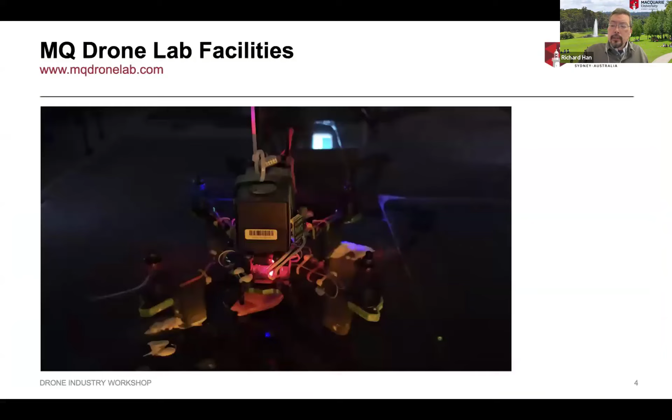Okay, so here is, hopefully, let me turn down this a little bit. This is a quick view of our drone lab.

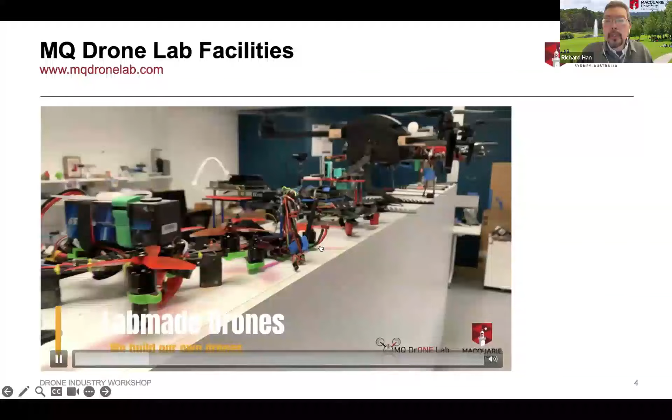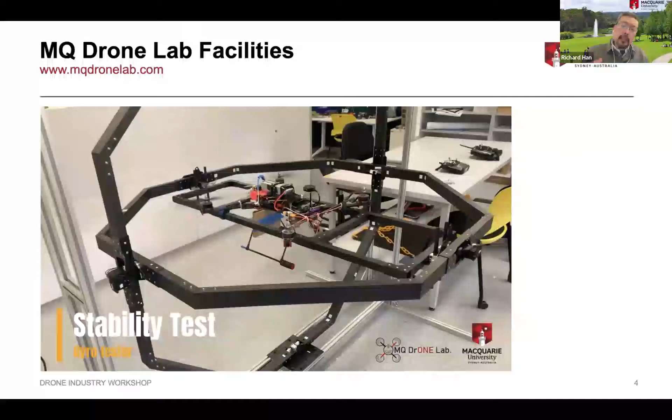We actually build our own drones from scratch. We don't just buy DJI off the shelf, which is fine, but as researchers, we're really devising new innovative drones, and so we have our own 3D printers.

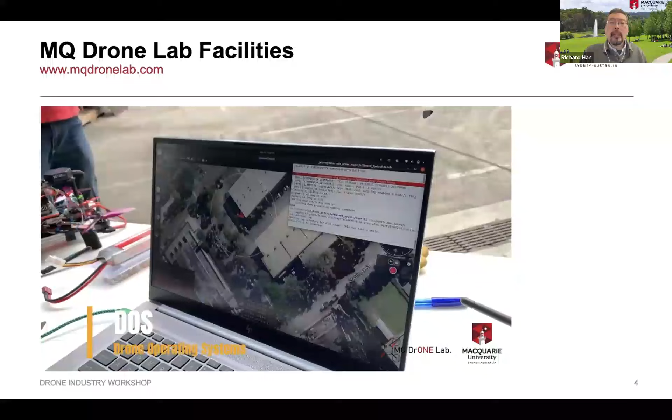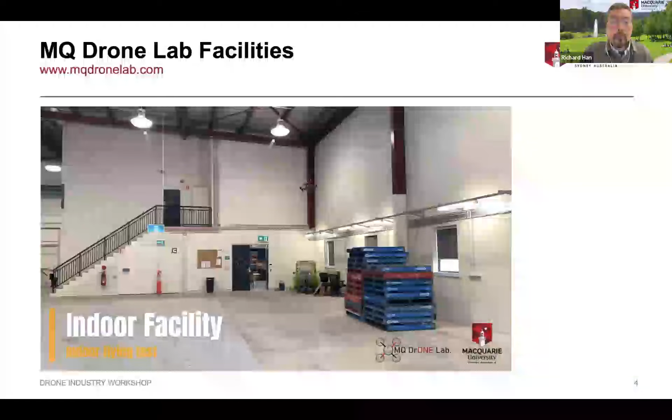We have our own calibration rack that you saw earlier, and then we have our own flight facility, where we actually can fly the drones indoors before we take them outside. It's very nice to have our own warehouse. It's very important, and not a lot of universities actually have this. We're pleased to have all of this.

The door that you saw in the background there is an example - our lab is right next door to the indoor flight facility, so we can very quickly build a drone and then test it indoors.

What are some of the research projects that we have going on? We have four main pillars of research in our drone lab. We're talking about autonomous drone systems because we think they should not have human intervention in the future, or less and less human intervention. We're very interested in swarms - what can you do with teams of drones? I'll show you two projects that we're working on here at Macquarie.

We're also working on high performance drones, drones that fly longer and can stay up and go greater distances. We have a $2 million project with Seaflight on more aerodynamic design of fixed wing UAVs, and we also have some research that we're pursuing a patent on that tries to improve the motor efficiency of drones.

We think we can improve the efficiency by up to 30%, which would mean you should be able to fly for 30% longer.

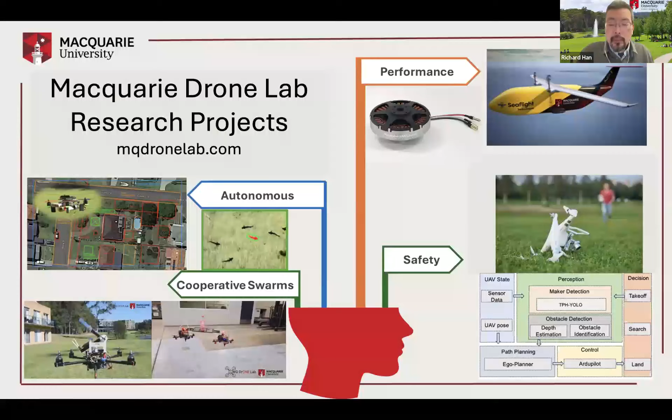The first project I want to talk about is our collaborative drone swarm lift and transport. Here we have two drones lifting a payload together, and we think this could very well be the future. This research was a finalist for a Best Paper Award at the IEEE ICARM Robotics Conference in 2024.

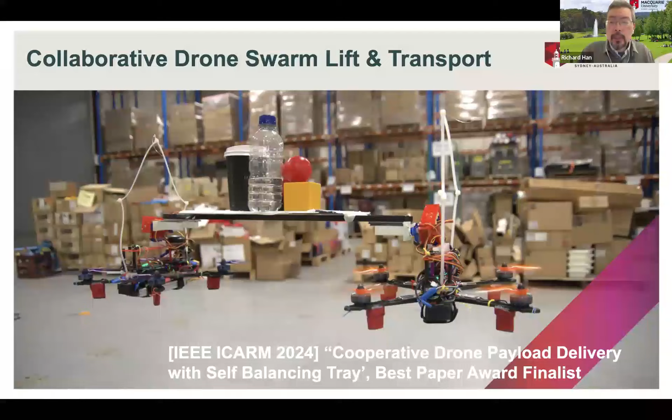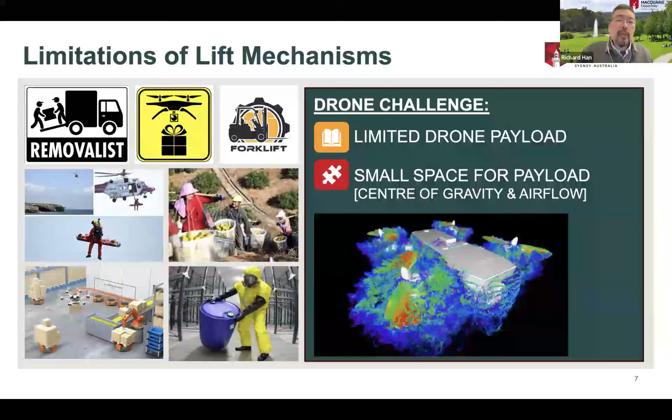What we're addressing is that each individual drone can only lift a certain amount of weight, and since these are usually small drones, there's not much room for additional payload. So we asked: what can you do if you combine multiple drones to lift more weight together? But to do that, you first have to solve a couple of problems.

You can see there's a great deal of turbulence underneath the propellers of the drone. This combination means that when building a group-based cooperative lift, we have to take into account both turbulence and balance.

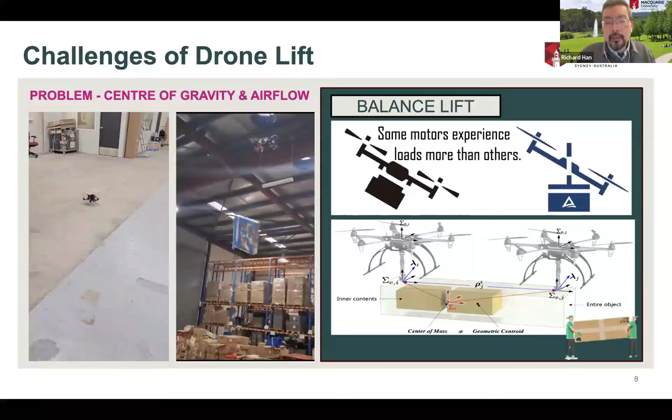Our initial idea for cooperative lift was to have a pallet holding the objects we wanted to lift, with drones attached to different sides of the pallet, lifting together. This is a very complex control problem, as they have to keep it balanced while transporting the payload.

This particular approach already shows problems, because the payload is underneath the propellers, subject to complex wind dynamics that cause strange behavior.

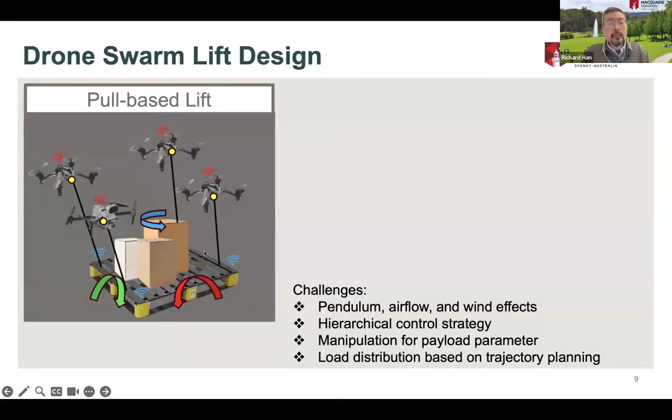So instead we said, why not move the payload and the pallet above the propellers, as shown here? In this example, the control algorithms needed to move the payload can be much simpler, since we don't have to deal with the interaction between the payload and the turbulence wind effects.

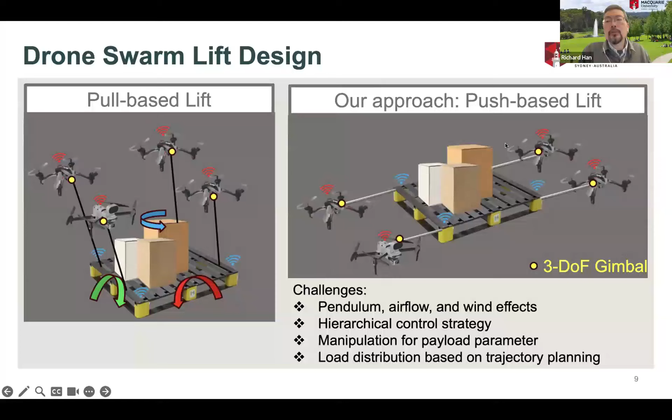We call this approach push-based lift, in comparison to the pull-based approach on the left. We've actually built this system.

We started with two drones, hoping to expand to more in the future, just to prove the concept. Shown here are two of our drones with a plate in between holding the payload. We call this plate the SBT, or self-balanced tray.

It has servo motors with three degrees of freedom that can adjust the level of the plate between the two drones, one on the right and one on the left, which maintains balance.

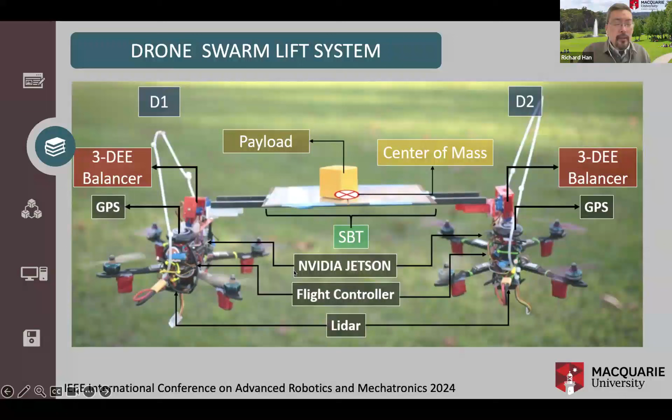Also, the drones have LiDAR attached to them, allowing them to hold the same altitude, and in addition they have GPS and many of the normal sensors for a drone.

If we drill a bit more deeply into how this works, looking top-down on the plate, we see it's divided into sectors. This tells us, if you put a payload on the plate, what is the center of gravity, and whether it's unbalanced. For example, here this is slightly off balance.

It's not in the center of the plate, and that's useful information because we feed it into the control algorithm. Here's our resistive plate, and we feed that into an Arduino, which has a PID controller on board that computes the amount of correction needed for each servo motor. We have control over three degrees of freedom: the pitch, the roll, and the yaw, and we control that over both ends of the plate.

So what happens is we have a lead drone that does the calculation, and it communicates over Bluetooth to the follower drone, telling it how to actuate the servo motors on its side of the plate. That way we maintain balance. In addition, we have our normal Jetson Nano on board these drones, which controls the flight controller, telling the drone where to move or hover.

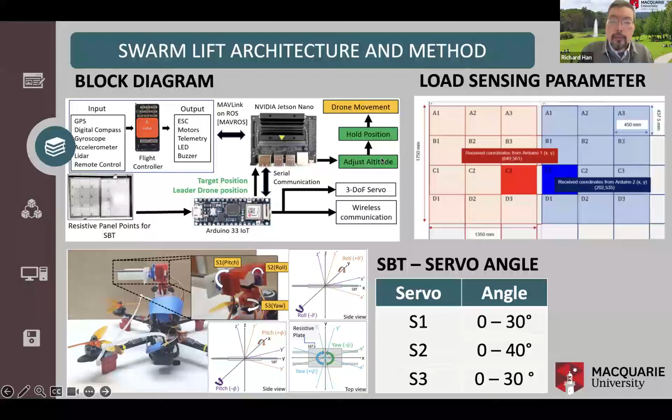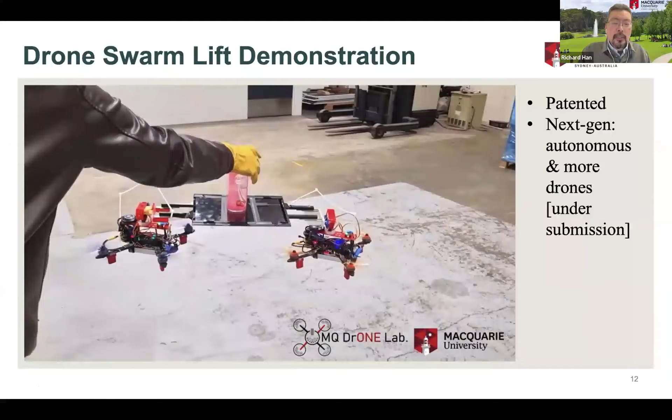Here's a demo of how this actually works, to prove that we got it to work. Our PhD student is putting a dynamic load here—it's not even a static load, it's a bottle of water. We see that our two drones are able to lift this together and transport it.

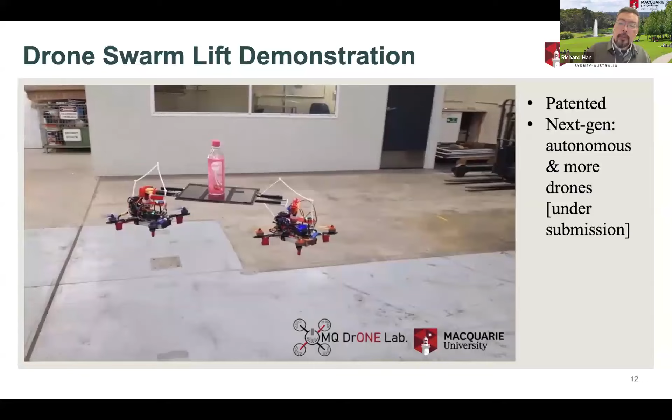We see Alice over here feeding remote control commands to the lead drone, which then moves the whole group together. This idea has been patented and published, and we're working on the next generation version, which will have more drones, be able to lift more weight, and be even more autonomous, so that we won't need remote controls at all. Okay, so that's the first drone swarm project.

The second drone swarm project, or drone team project, involves emergency battery services. I noticed our prior speaker mentioned limited battery time as a problem for drones, and that's what we're addressing with this project. This was just presented last week at the ACM Mobile Computing Conference, a top conference in mobile systems, which is why I'm here in the United States presenting it.

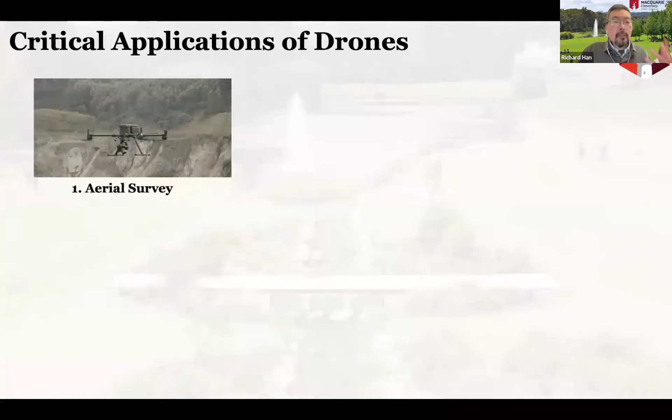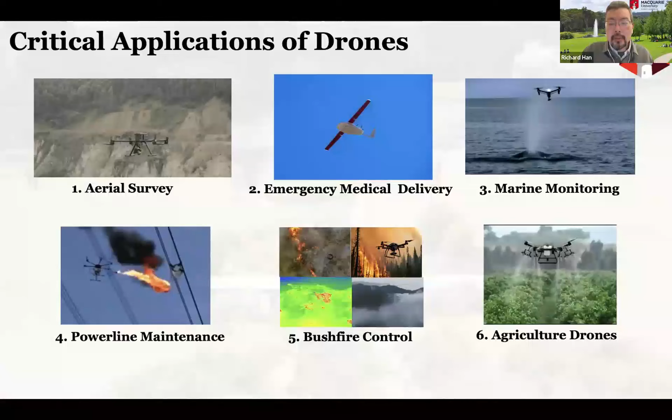It's likely that for the foreseeable future we're going to have this problem, because Moore's law does not apply to battery life—it's not doubling every year. Battery capacity is only growing incrementally, by about 10% per year.

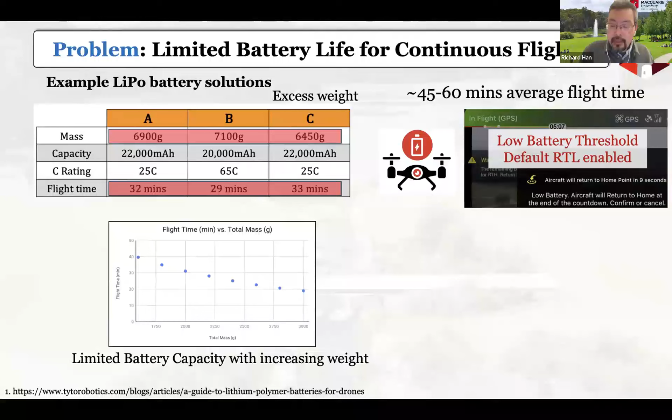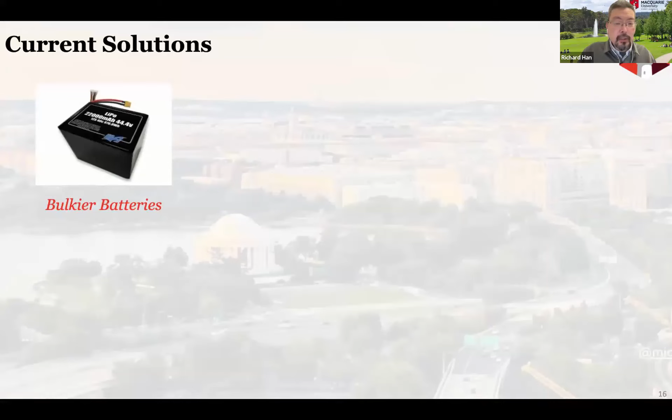So what are the ways people deal with limited battery life on drones? Well, they try to buy bigger batteries, but there's a limit to what you can do there. Another approach is ground-based battery swap, where they fly back to a base station and swap the battery, or fly back to do wireless charging. The problem with those approaches is that the drone has to leave the field wherever it's doing its work, and in certain cases that may be okay, but in others, like tracking a target, it's not.

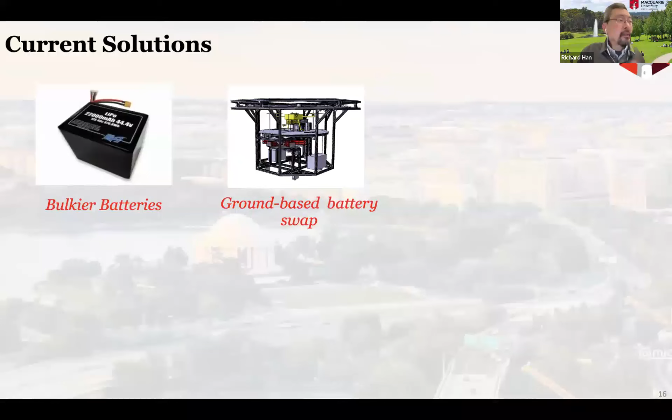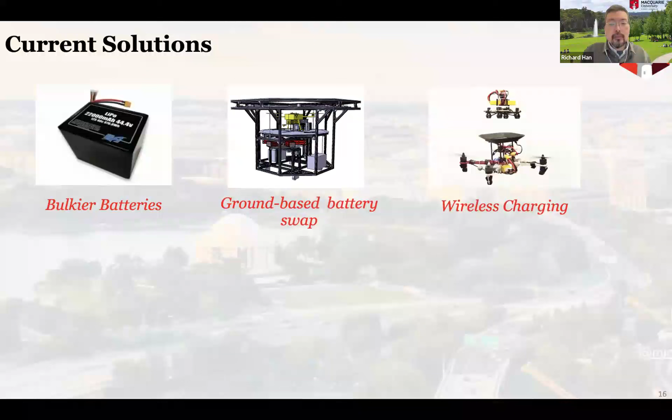There are some cute approaches where a flying battery actually lands on top of a drone, but this flying drone is much smaller than the main drone that needs the battery, so it doesn't work very well. Another option is just to buy more drones, so if one drone's battery runs out, you fly a second drone in. That requires spending a lot more money and managing a lot more drones, which is a big headache.

Finally, there's one prior work that tried to do mid-air battery swap by dropping the battery from a top drone to the bottom drone, but as we saw, there's a lot of downdraft turbulence between the two drones.

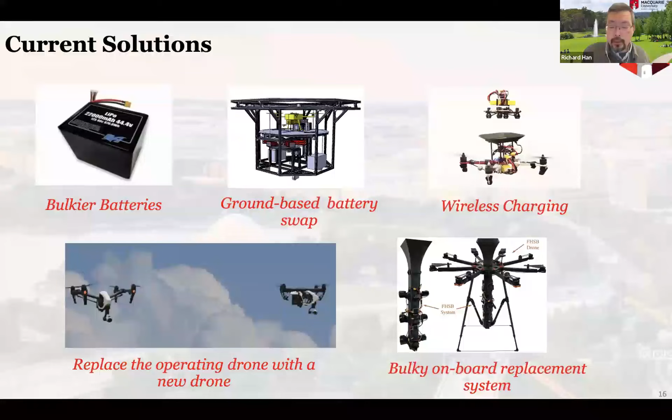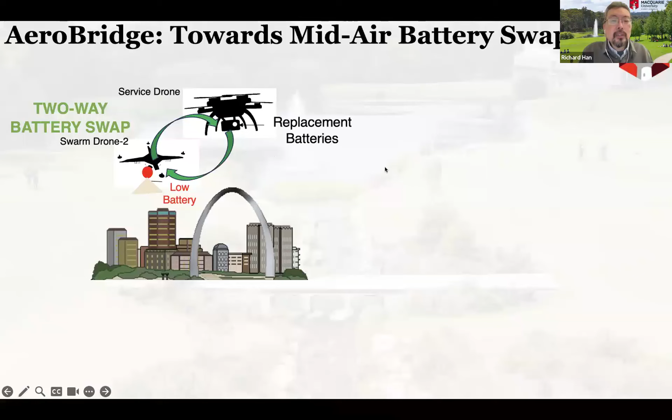They have to be separated by 5 to 7 meters, which makes the accuracy of the drop more uncertain. So we said, let's experiment with the idea of a mid-air battery swap, where a mother drone with a fresh battery comes near another drone in the field, and we swap batteries in midair, giving a fresh battery to the low-battery drone and retrieving its worn-out battery instead.

This approach has a lot of advantages. It means your drone can now stay in the field almost indefinitely, subject to mechanical breakdown. Also, we're bringing the battery to the drone rather than forcing the drone to fly back to a base station to get a new battery, so it can continue to do its tasks in the field.

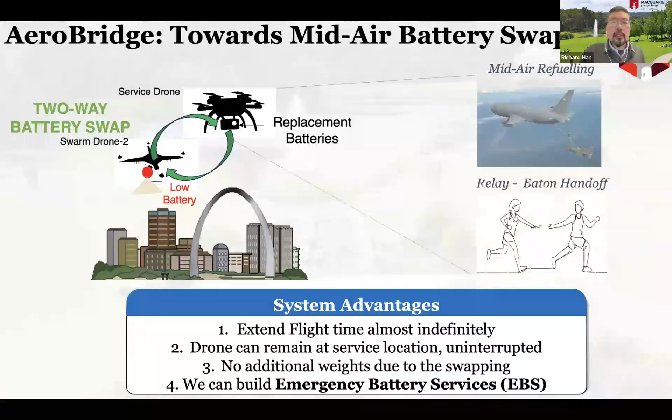Also, because we're swapping the batteries, we're not adding any more dead weight to the drone, since we're taking away the dead battery. So we call this Emergency Battery Services, or EBS, and we think this is going to be very common in the future as an additional feature for drones.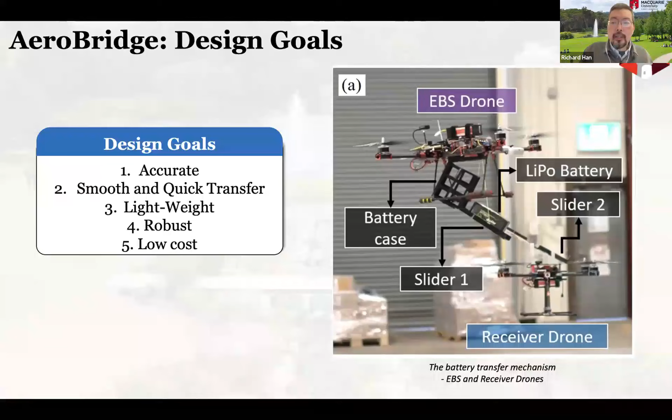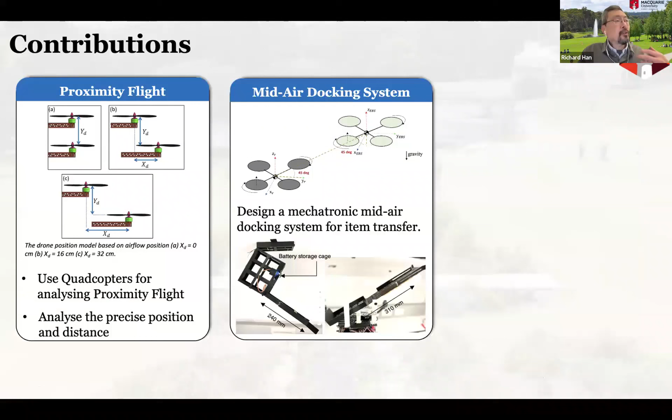So we eventually built this approach. Basically, we have a slide which allows the battery to slide from one drone to the other. The trick is how to get these two slides to align in midair. We have to get the drones close together, and figuring out how they approach and navigate toward each other is one of our contributions. Then how the slides meet—we call this the last centimeter challenge.

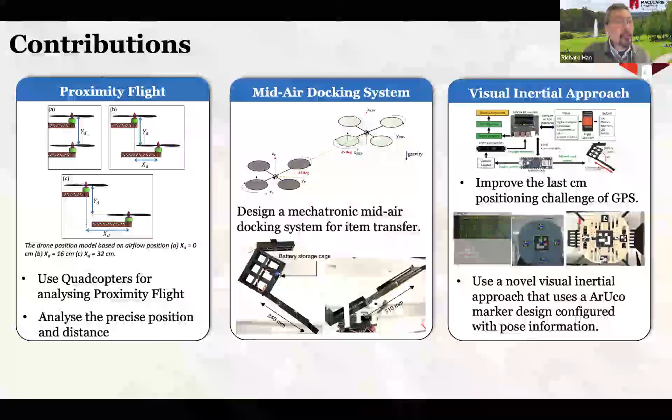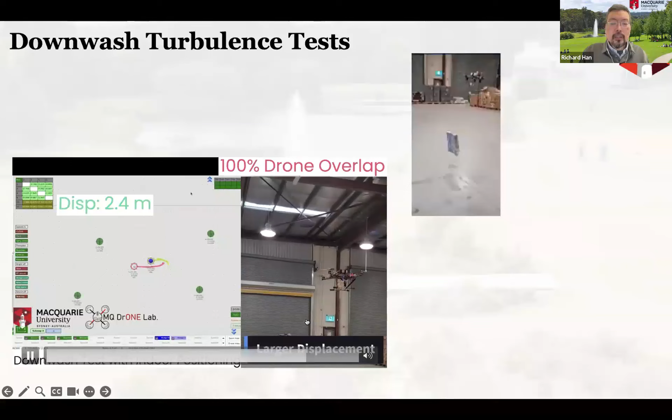We already mentioned that the drones, when near each other, experience a lot of turbulence. As you can see in this example, the drone underneath is pushed away by the turbulence when they're directly on top of each other.

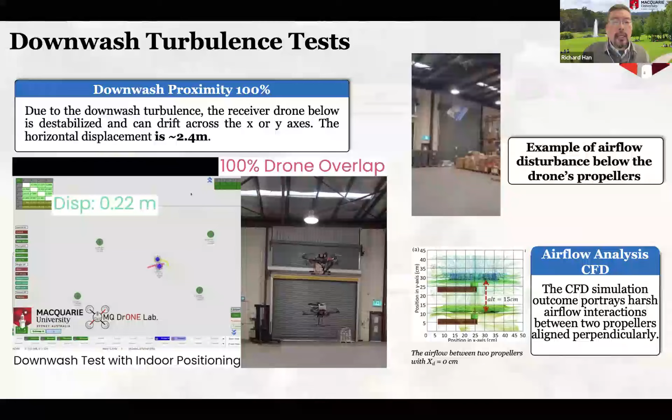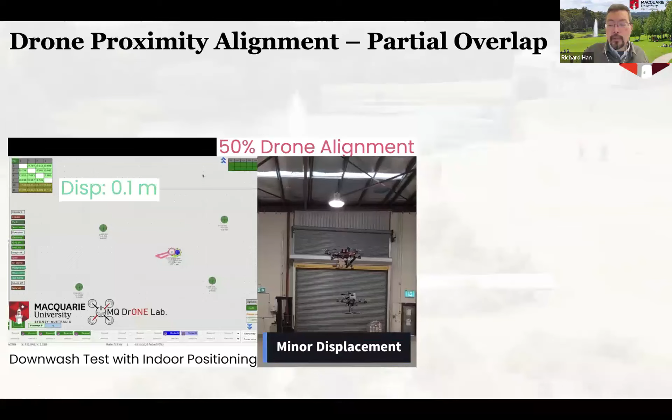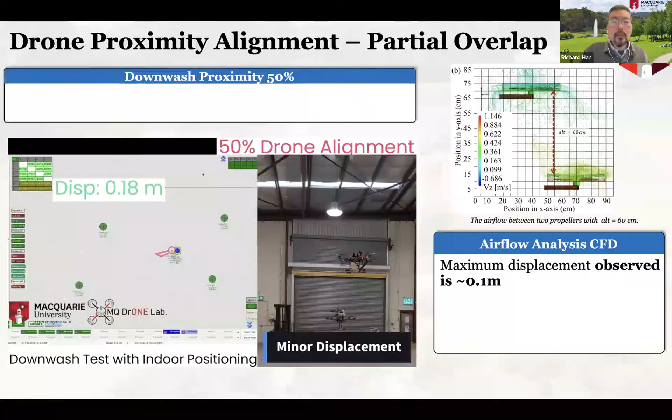But we found that you can overlap the drones by almost 50%—not 100%, directly on top of each other—but if you overlap maybe only half of the propellers, you're able to get them relatively stable near each other, and the displacement isn't nearly as bad. We use that to our advantage, because it allows us to get within 0.5 meters of each other, which makes the docking a lot easier.

The actual orientation and docking is achieved by putting visual markers on the receiving drone. We put a unique marker that can be identified by the top drone, so it knows which drone it's doing the battery swap with.

Then we add four extra small markers—front, left, right, and back—that are all unique and help determine the top drone's orientation relative to the bottom drone. It will know if it's in the wrong place and has to move around until it's perfectly aligned. Also, because of the size of the markers, it knows the distance it is from the drone.

When all of these factors align—when all the markers are correct and their sizes are correct—then you're in the right place, and the two slides can come down, connect, and transfer the battery. So let me show you.

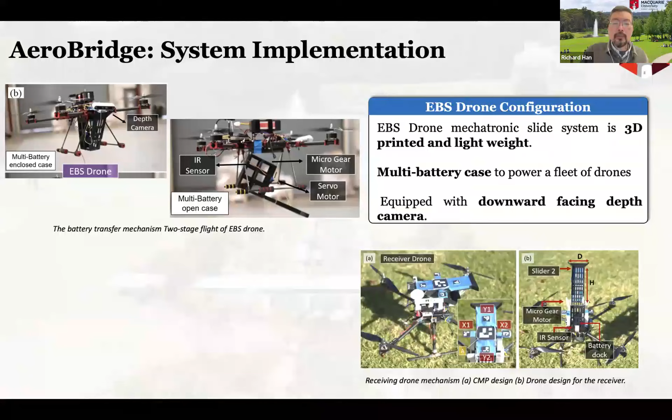We built the system: the top drone with a slide, and the bottom drone with the markers and a receiving slide. Let me show you—we're out by the lake here, and you see that we're able to transfer the package from the first drone to the second drone.

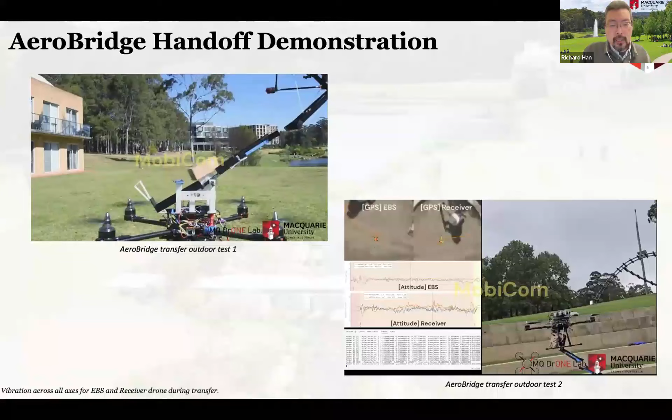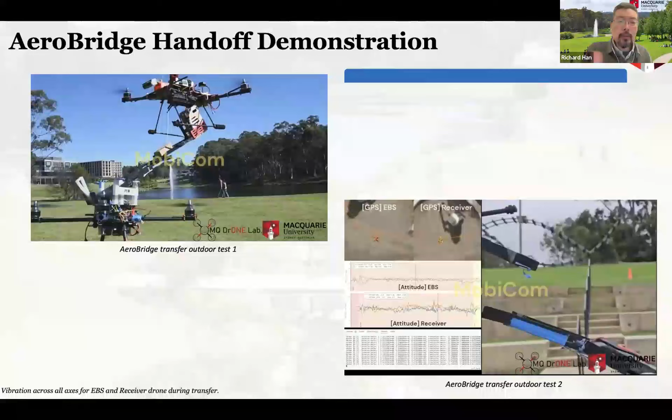Now, what we could have done is try to make this more perfect and make a really smooth demo. But we felt the most important thing was that the two slides were able to get close to each other, and the rest wasn't as important from a computer science point of view. Over here on the right, we're actually seeing an actual battery being transferred from one drone to the next.

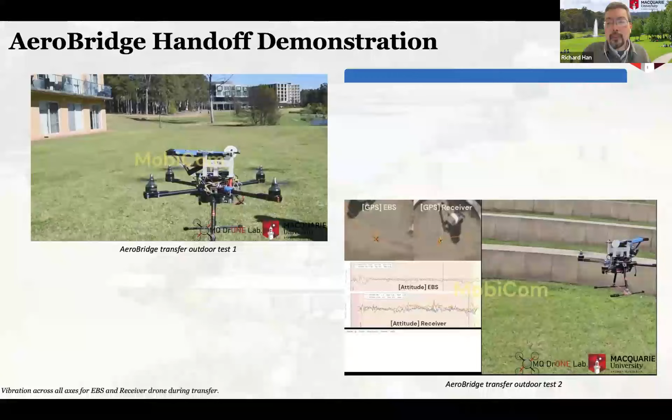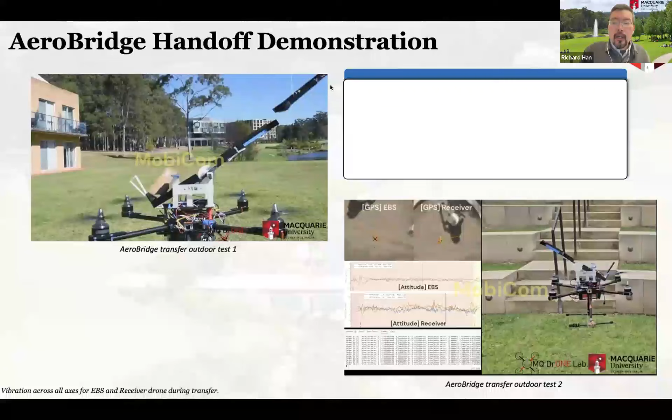So you'll see this over here. There's an actual battery sort of going across the slides. Okay, so that's the AeroBridge.

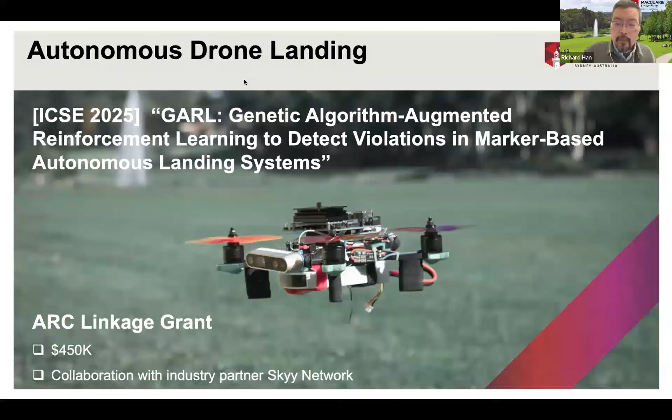The final thing I wanted to talk really quickly about is that we're also working on autonomous drone landing. This is a work that's about to be published, and this is in conjunction with an industry partner called Skyy Network. And the problem is that drones don't know how to land autonomously. Not even Google or Amazon have solved this problem. And that's because if you look at this picture and you want to land, it's very difficult to figure out what is a safe landing spot.

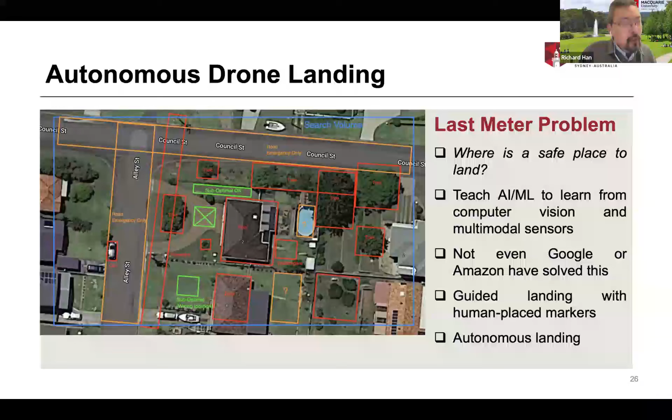If you were to look here, maybe you could say, here's the driveway, and maybe that's okay to land there. But right over here on the street, it's a flat location. You could drop your package there. But if you were to land there, you could get hit by a car. And so you have to teach the drone using AI and machine learning what are good places to land and what are bad places to land. And this turns out to be a difficult problem.

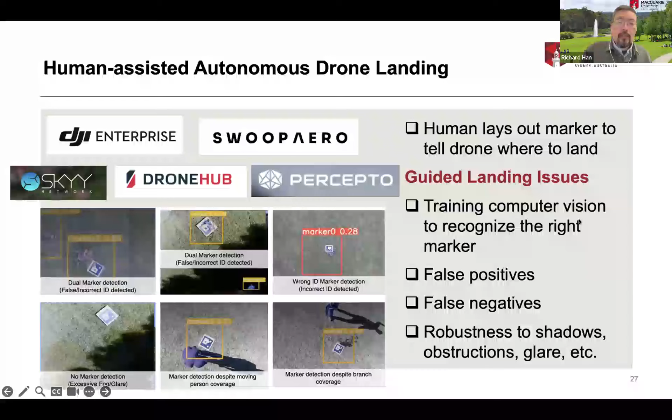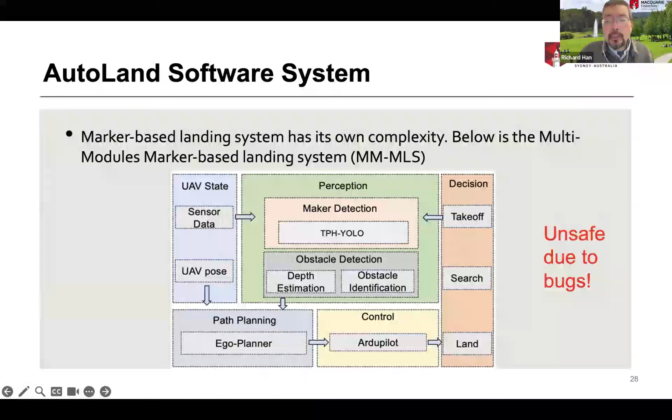And so we've developed an AutoLand software system with our industry partner, and you see it's fairly complicated. There's marker detection, there's obstacle detection, there's path planning. There's a lot of pieces that can fail in order to do this marker-assisted landing. And so this could be caused by bugs. And so the industry is very interested in making sure that the drones are safe to fly and the software is as bug-free as possible.

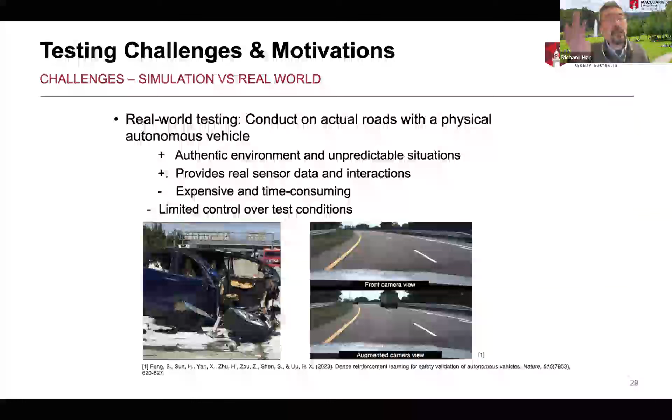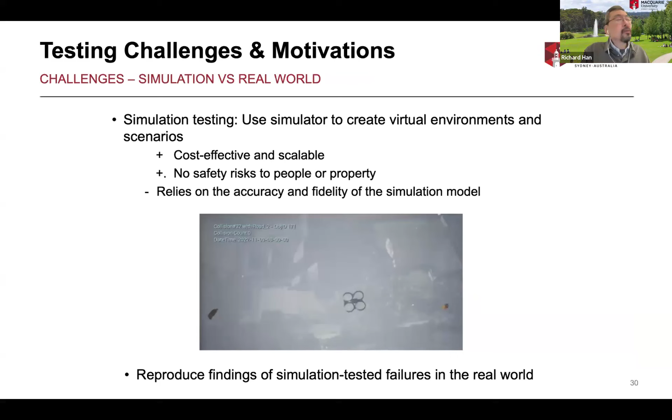Now, you can do practical real-world tests, but you can only do so many real-world tests. In simulation, you can do millions of tests, so it's very scalable. But you have to make sure that your simulator is accurate, okay? And in fact, we actually try to reproduce the findings of our simulation in the real world. Now, I won't go into too much detail here.

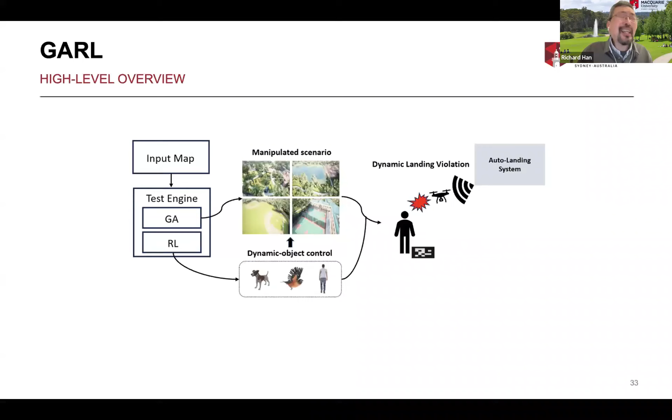I'll just say that we have an approach that uses genetic algorithms in combination with reinforcement learning that will generate test conditions that will try to break the software in a very efficient way. So this is how we combine the two together, the genetic algorithm plus the reinforcement learning. I won't get into the details here. I'll just say that the technique overall has been very effective at finding ways to break the AutoLand system.

For example, maybe it's rain that causes the sensors to fail, or maybe there's a person walking near the marker while it's trying to land, and that causes the AutoLand system to fail. So we've been able to find these failures much more effectively using our GARL approach compared to a bunch of different baselines. We tried to classify all the different failures. Some were false positives, some were false negatives, some were due to static collision, others due to dynamic collision. And then we also found some bugs in the actual planner software itself.

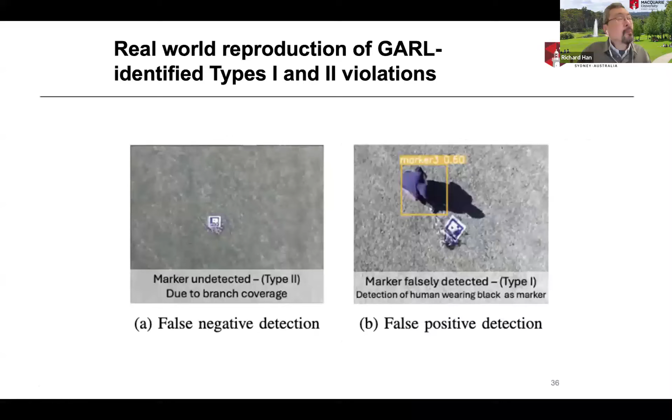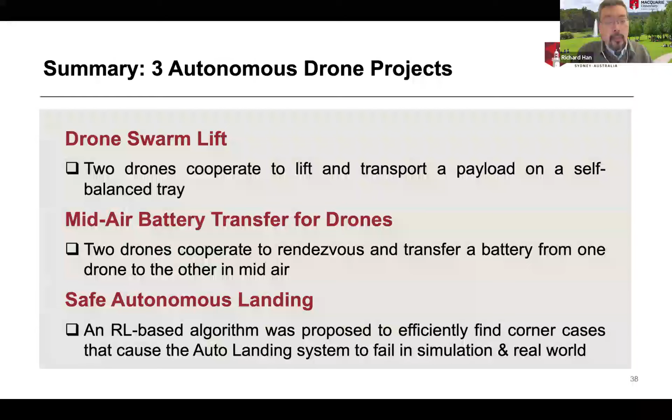Okay, so that's a very quick survey of three research projects that we have in autonomous systems. Two are dealing with drone swarms, the drone swarm lift and the mid-air battery transfer. And the third one is dealing with autonomy in terms of safe autonomous landing. And with that, I hope I kept my time. Happy to take questions.

Fantastic. Richard, that was so interesting. I was concentrating so hard on the presentation because there's a lot of new information in there. As you said, next generation type of research. So it was also one of those presentations where you sit there and think, wow, let me catch up a little bit.

I've got quite a few questions, but I'm also sort of still processing some of the opportunities that some of that research presents as well. So I guess that's one of the questions. I could sort of imagine in an agriculture sense, and you're getting lots of positive feedback there too from the audience, of the swarm lift type approach in agriculture. So have you been thinking about that from an agricultural perspective around how that could be used? I mean, I'm thinking particularly in sort of more isolated areas or areas on a farm, for example, that are quite difficult to get to. That could be actually really useful. What are your thoughts on that?

I would be interested to hear what Kwong had to say about that. But I mean, we're offering the capability, and we think that it would be useful in a variety of scenarios. We thought, like in construction, for example, you're often lifting a lot of heavy boards and such onto the roof. And if you had a bunch of drones who could very quickly, in a cheap way, provide lift capability and move something from this place to the other place on a construction site or on a farm, that to me seems pretty easy, because you can't hire a helicopter whenever you want to do this, and moving stuff across a muddy field could be really painful.